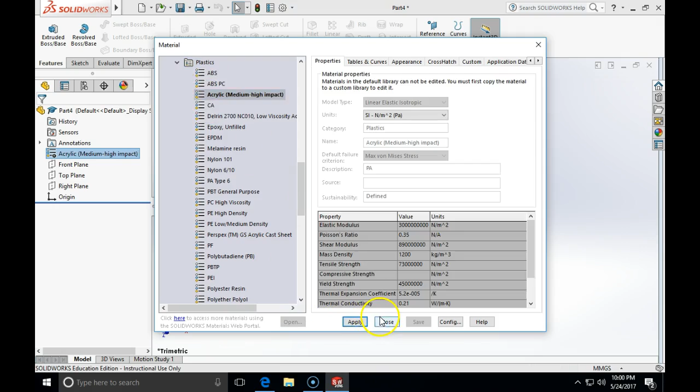So we are going first to make a rectangle of 90 by 24 millimeters. So we are in MMGS, material is acrylic. Acrylic. Sketch the front plane. Going to make a rectangle, which will be vertical 90 millimeters and horizontal 24.

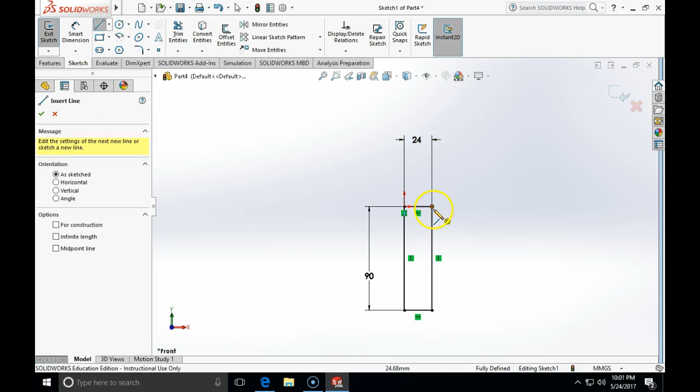Now, I'm going to make a line, which will be a horizontal line of arbitrary length from this edge to somewhere out and to this edge here. Now, next thing that I will do, I will place the distance of 145 between this vertex and that vertex there. And that will be the distance between this point and this line, 145. And look what happened, it is fully defined. I'm going to extrude this.

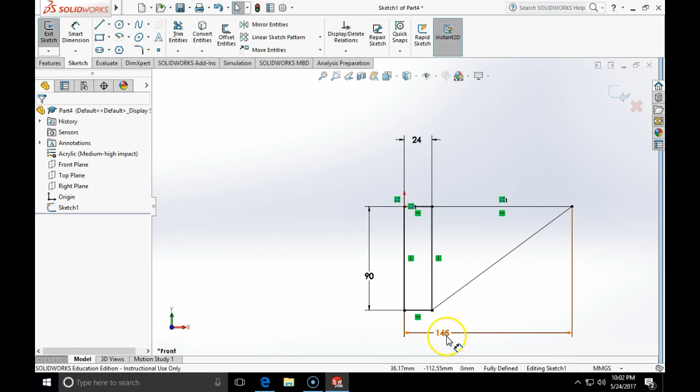So the line that you did horizontal, you just made a normal line? I just make it, yeah, it's just a normal line. It's a line which is horizontal, which extends from this point outbound, and then it closes to here. And then I just put arbitrary, because how long it will be is determined after with this dimension line. And then I place just a dimension line between this vertical line and this point. And I type in 145. And I can extrude this.

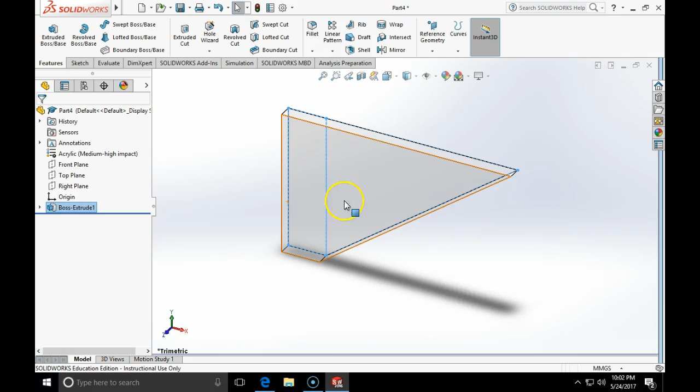I will choose the contours. And I choose both contours. And I will say that this is 5/16 IN. And this is my first basic primitive for this model.

Now what I will do, I can put those two cuts, and as I said, I want to accommodate 5/16 inches, so I'm going to put it a little bit more, like 6/16 will be a 3/8, so I can put like a 3/8 of the inch thickness at 78 millimeters up. However, I will do this one only later on when I do the mirror, so I can do this one. So if I do it like the 3/8, actually that will be a 3/16 rectangle, because it will be a 3/16.

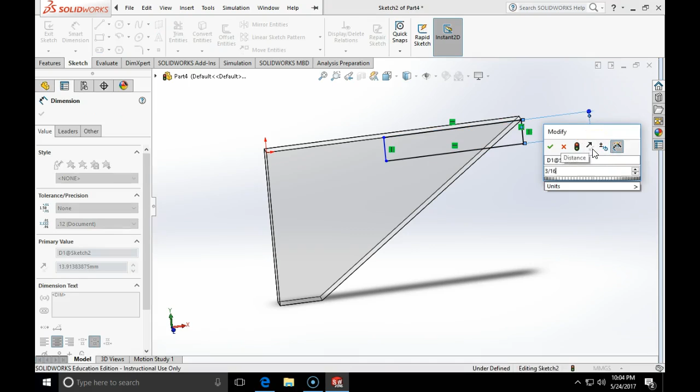So let's do it. Let's do the rectangle sketch, which we are going to do arbitrary like this. Thickness of that rectangle, I will say that it is 3/16 IN. And the length of that rectangle will be 78 from this end. 78. Okay, that will be my first cut.

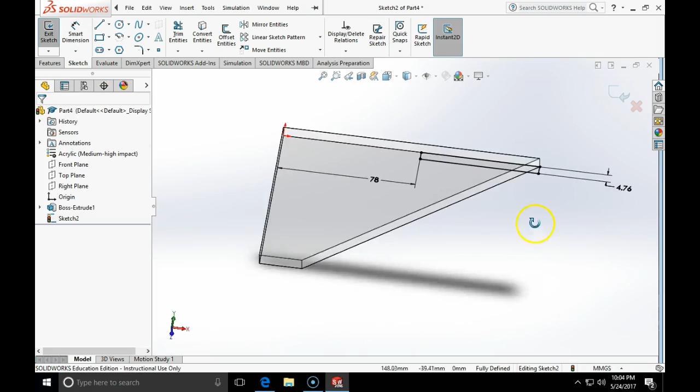Close the sketch, features, extrude that cut, and it will be a through all, and that will make that top cut. Okay, now let's start making these features here.

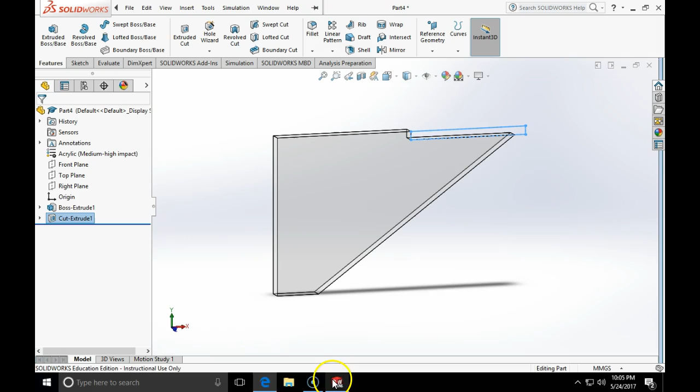So I'm going to start a new sketch. I'm going first to make an offset entity, and the offset entity is this icon in the middle of the sketch pane, and I will say that it is offset by 12 millimeters. And I will say that this is a construction geometry. Offset geometry will be a construction geometry. I'm going to click this line, and here is my construction line offset by 12 millimeters.

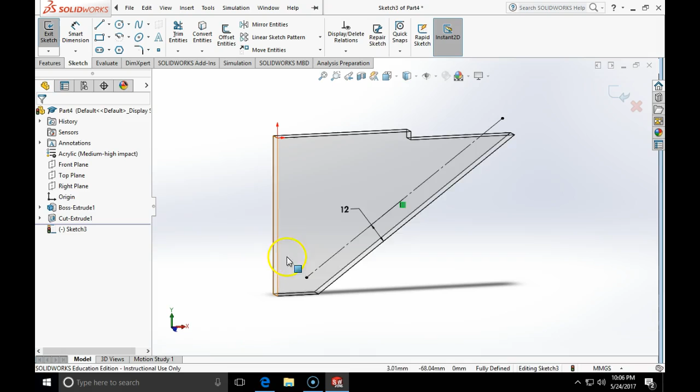I know that the circle center will lie somewhere on that construction line. So now I can place a circle of arbitrary size somewhere here with its center located on the line. I will dimension that circle to be 14 millimeters in diameter.

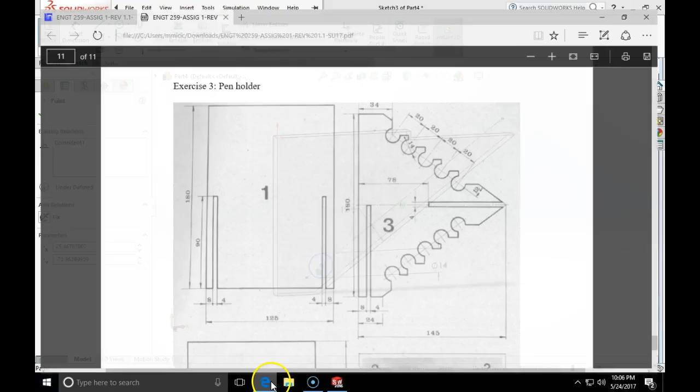And now I'm going to position that circle. Now this circle I can move anywhere across that line, and now I'm going to position it for a first seed element, and the first seed position will be what? Will be 34 millimeters from the base. So if I go here, if I click and I choose 34 millimeters, and look, the circle just got fully constrained.

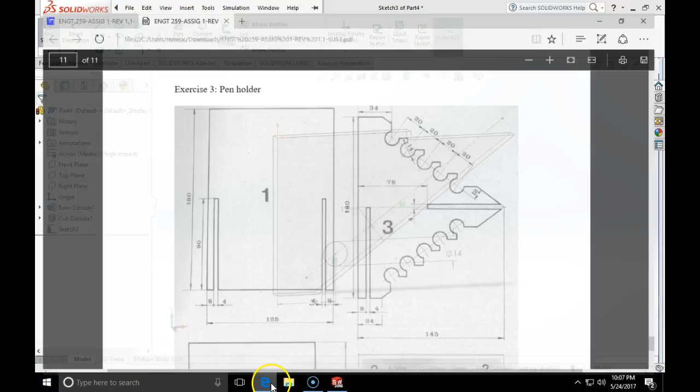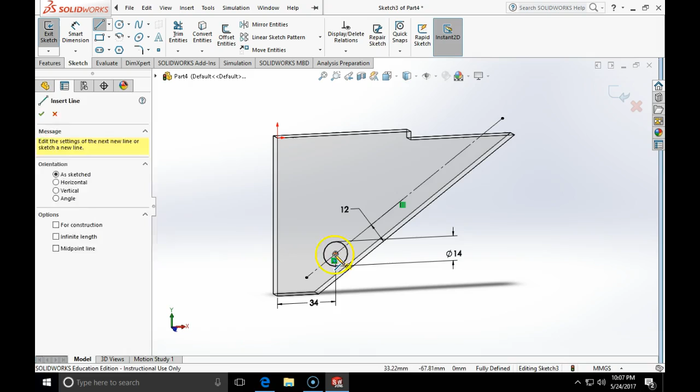Now, I want to create those two cuts. To create those two cuts, I need to look into some of the geometries here, and let's see what I can conclude here. At 34 millimeters, there will be a vertical line coming down, and then from the center it will emanate outbound. So I'm going to have a vertical line from the center, which will be coincidental with the edge. So I'm going to close this sketch.

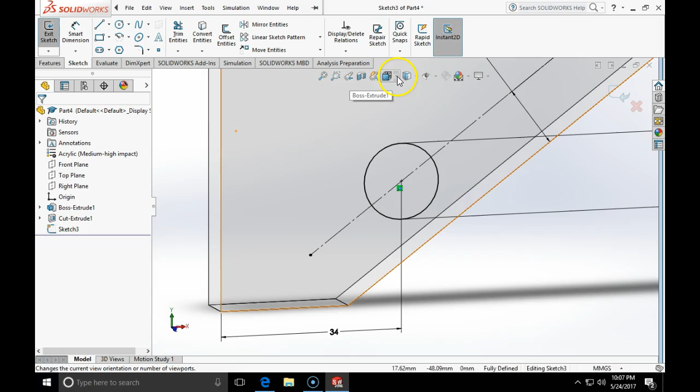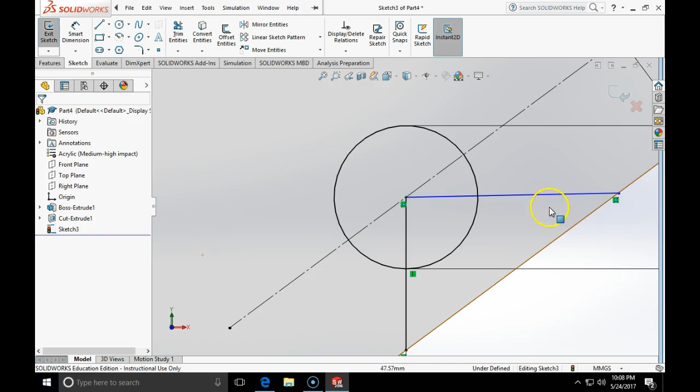Actually, I can continue in the same sketch. I don't really need to close it. I can look normal to it to help me. So I'm going to create a vertical line from the center to the edge. It needs to be coincidental with the edge, and then I will click on the line with the left mouse, make it vertical. And I'm going to create another line exactly like that. However, this time, coincidental with the edge, I will click on the line and make it horizontal.

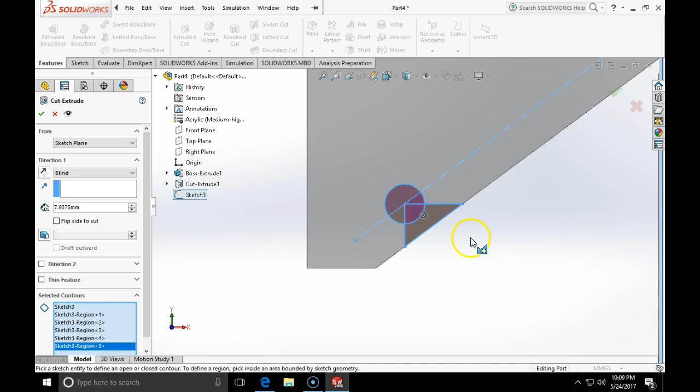And I will need to create a third line which will connect those two dots in order to have a closed contour for an extruded cut. And here is my geometry done for my first extrude cut. So I will close this sketch, and I'm going to extrude cut. Extrude cut. Choose my last sketch. Then I am going to choose the proper section of the sketch, and it will be a through all condition, and click OK. And here is my first cut.

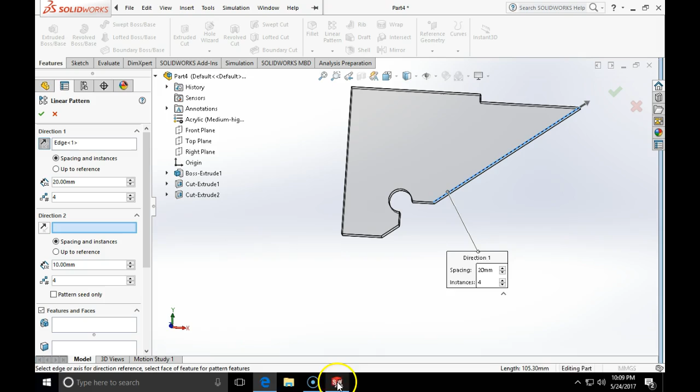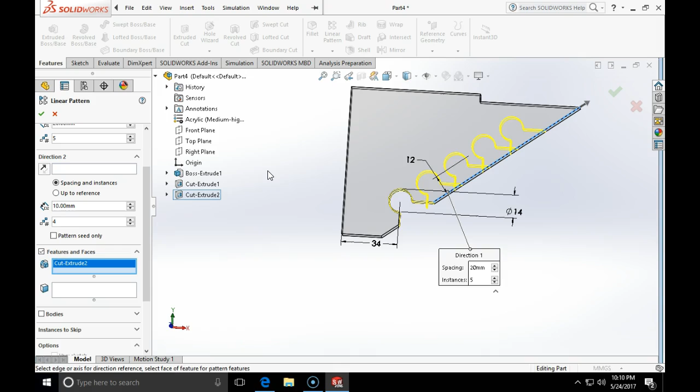Now I want to propagate this cut 1, 2, 3, 4, 5 times with a 20 millimeters offset in distance. 5 times 20. So how am I going to do this? I will use the linear pattern, where for direction 1 I will use the hypotenuse edge. Spacing will be 20, and instances will be 5. And the items to propagate, we don't need direction 2. The item to propagate will be cut extrude 2. And the moment I get it, look what will happen. Here is my piece created.

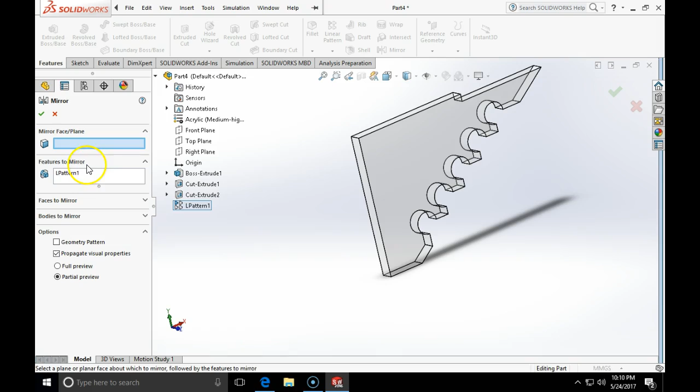And that's complete. Now I have just to do the mirror, and that will be the body mirror. If I click on bodies to mirror, that's my entire body, and mirror face plane will be this surface here, and I need to be sure that the merge solids button is on. Click OK. And now I have the last element to design. The last element will be this cut here, 8 millimeters, and I said that it will be a 3/8 thickness so that I can cut it out of the 3/8 acrylics.

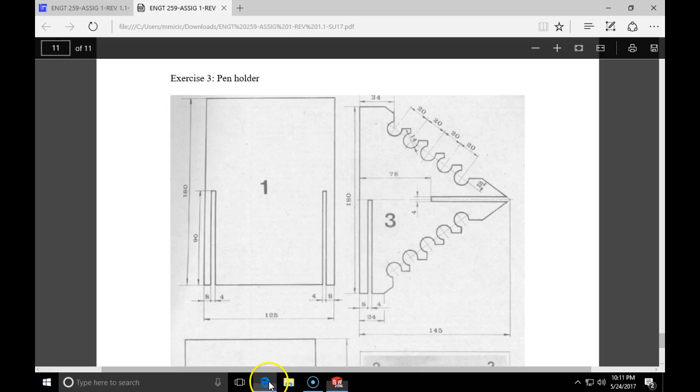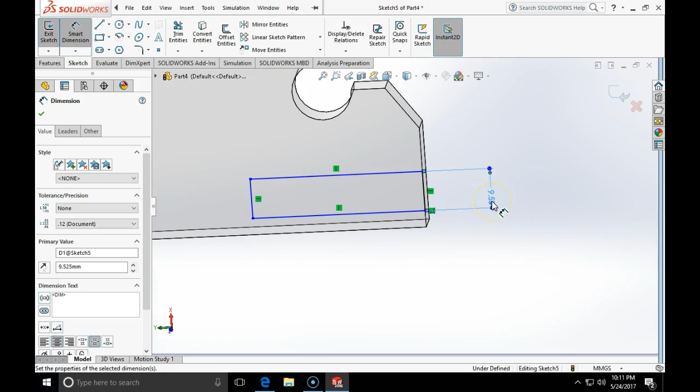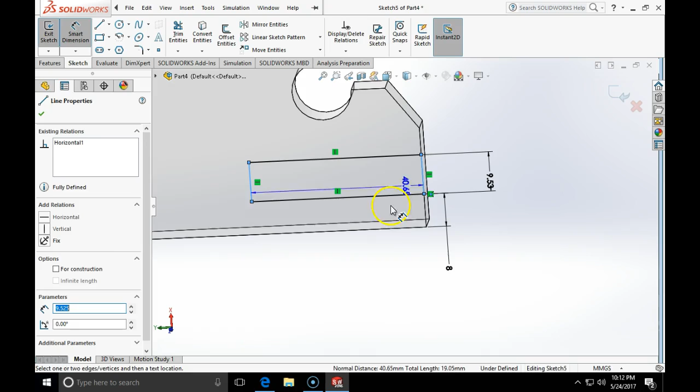So let's see, 8 millimeters offset and all the way for 90 millimeters high. So I'm going to make a sketch here. Going to make a rectangle of arbitrary size, where the thickness of this rectangle is going to be 3 divided by 8 inches, and the distance between the rectangle and the base is going to be 8 millimeters. And finally, we are going also to specify one more distance here, and that will be the length, and the length will be 90.

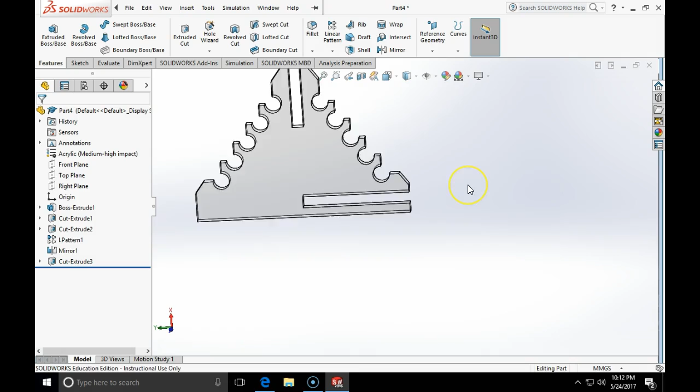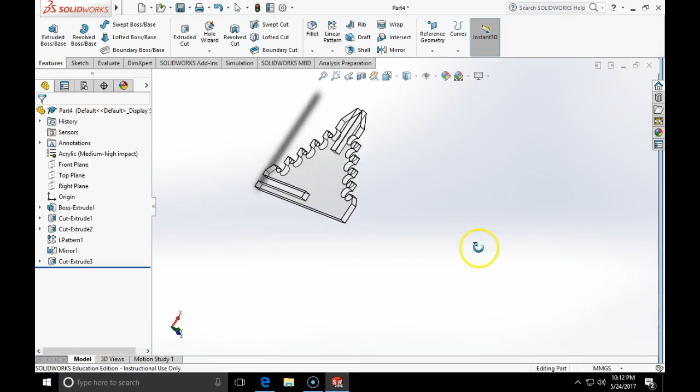We'll click OK. We'll go to Features, Extrude Cut, open my parametric tree and choose this, and I will go again through all, click OK. And here is our complete feature, and if it is specified as acrylic, the mass property of this feature will be 106.07 grams. And that concludes the demonstration of making this pen holder feature.